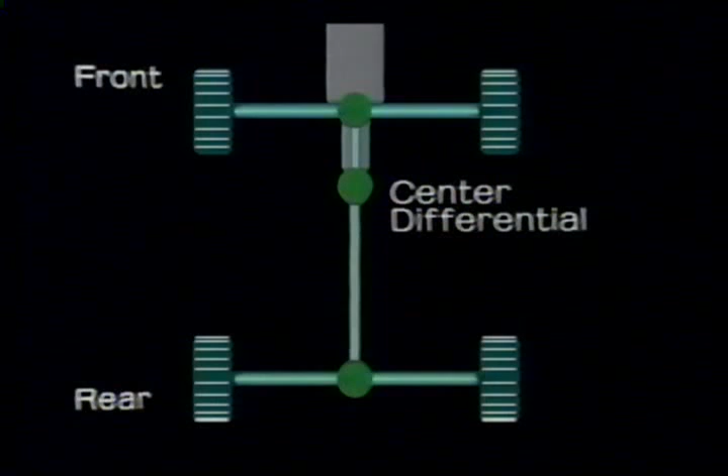To construct a full-time 4WD from a part-time 4WD, Toyota added a differential between the front and rear differentials like this. The third differential is called the center differential.

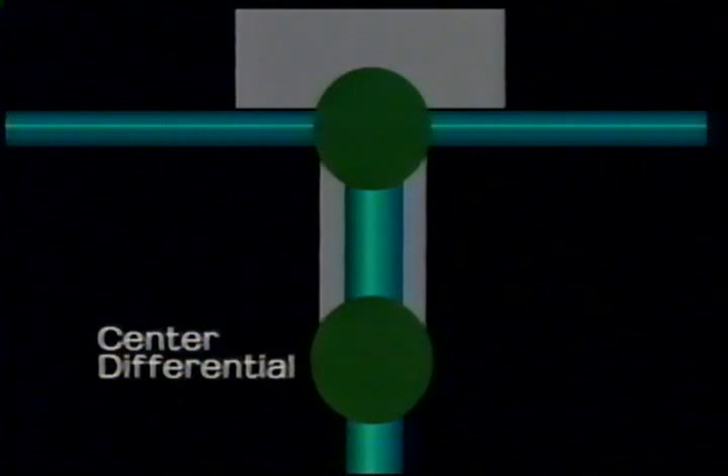Let's examine the center differential using a model. It is built the same way as a conventional differential, and its operation is already familiar to you.

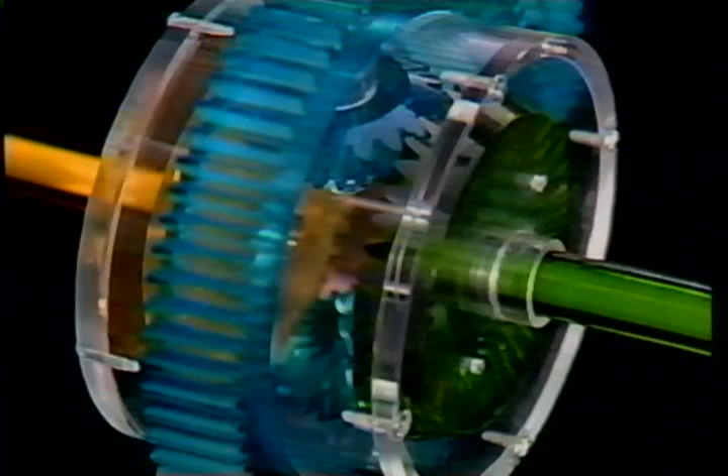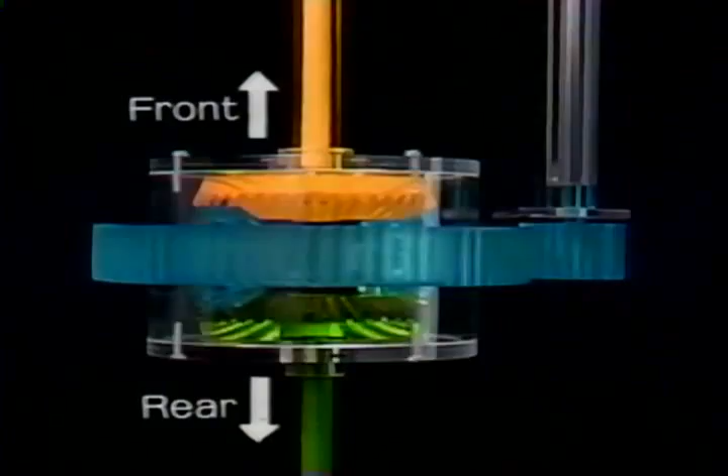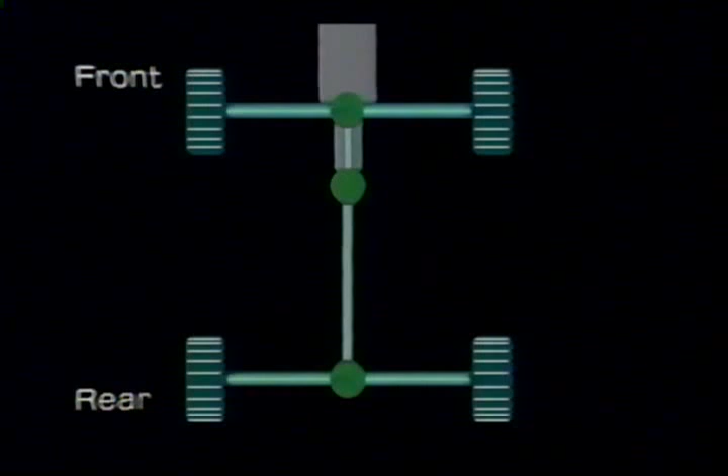The center differential distributes engine power to the front and rear wheels. On a full-time 4WD vehicle, the engine's power is first transmitted to the center differential, then to the front and rear differentials, and finally to the right and left wheels.

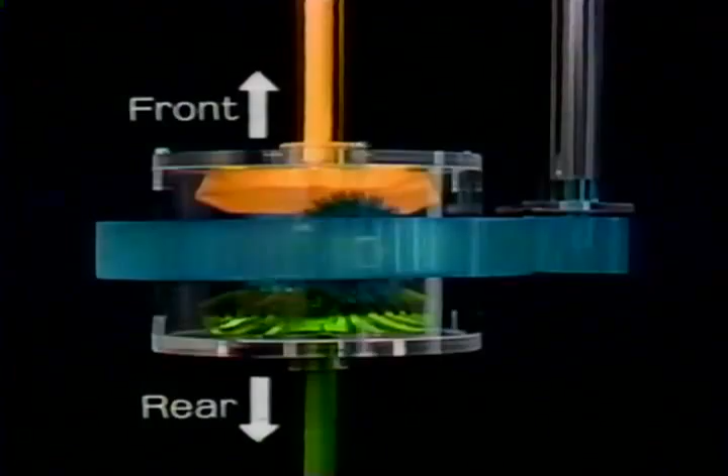But, as you already know, power is no longer transmitted from the engine to a wheel when the other wheel begins to slip. When one of the wheels slips, all other wheels stop running, as you see here.

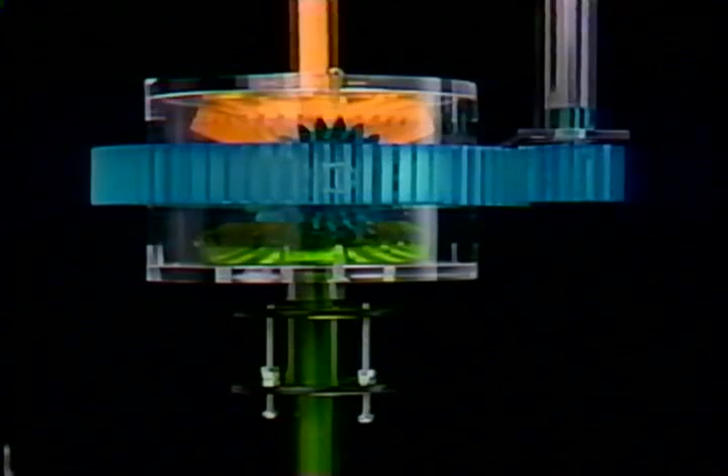This problem, among others, is solved by adding a locking mechanism in the center differential. When the center differential becomes locked, the center differential case and the rear differential are locked like this.

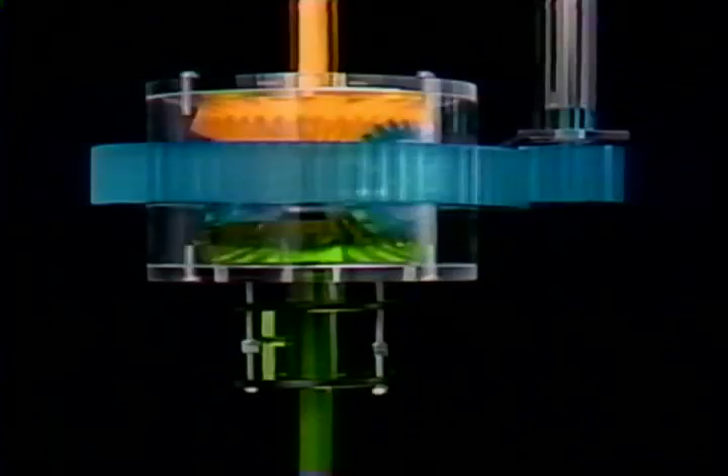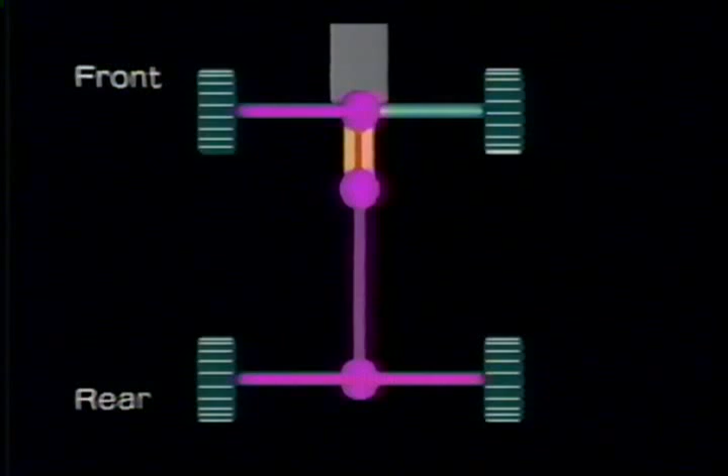When the left front wheel slips, for example, the engine power is still transmitted to the rear wheels when the center differential is locked. The vehicle can get out of the slip situation as a result. On an actual vehicle, the center differential is locked with the differential lock switch.

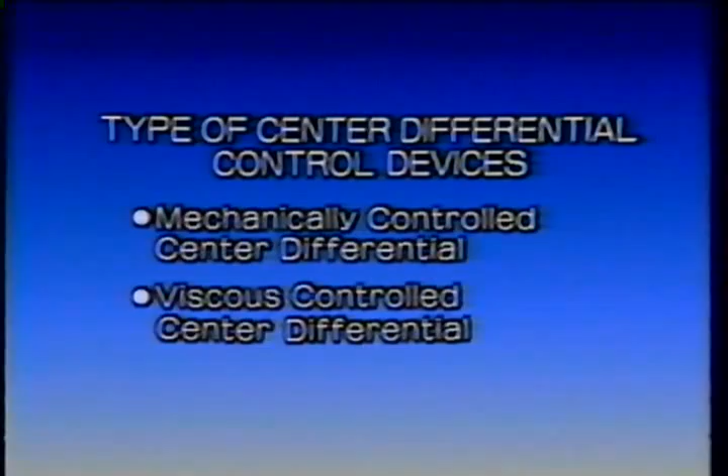The center differential is controlled by a mechanical locking system. The center differential's operation can also be controlled by an additional viscous coupling device. In this video presentation, we will focus primarily on the mechanically controlled center differential.

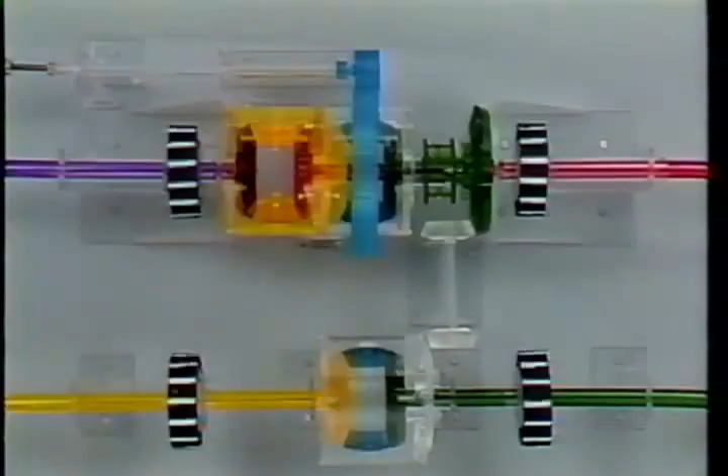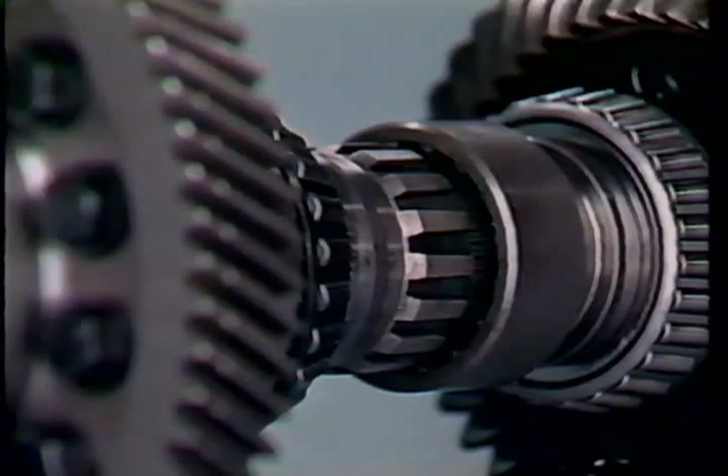We will study the construction and operation of the mechanically controlled center differential, what the driver should know about its uses, what service technicians should know about it, and we will also study the viscous controlled center differential.

Earlier, we looked at the basic construction of a full-time 4WD vehicle. We will now examine the construction of a Toyota full-time 4WD system. The center differential in the Toyota full-time 4WD system has a unique design. The front differential is incorporated in the center differential to form a compact unit, which is located here.

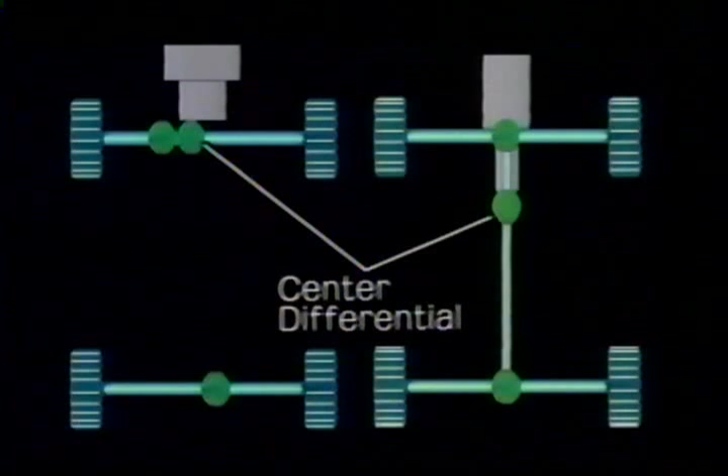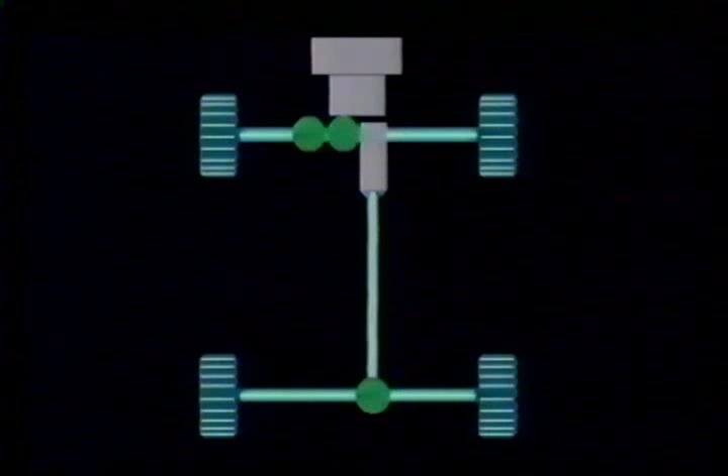It also contains a differential locking mechanism. The transfer is located here. Let's study the transaxle first.

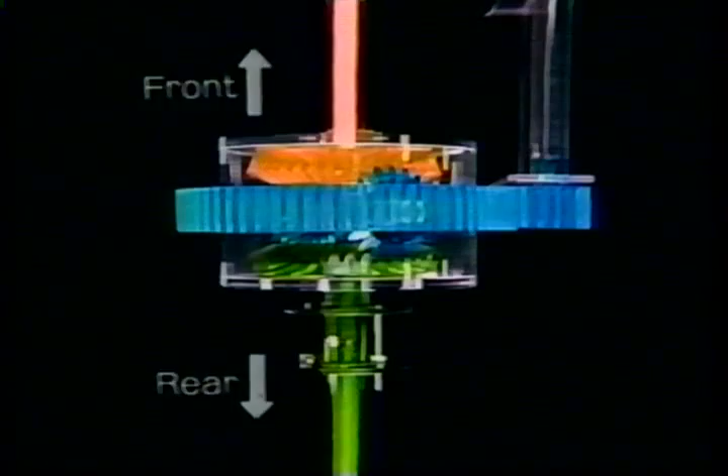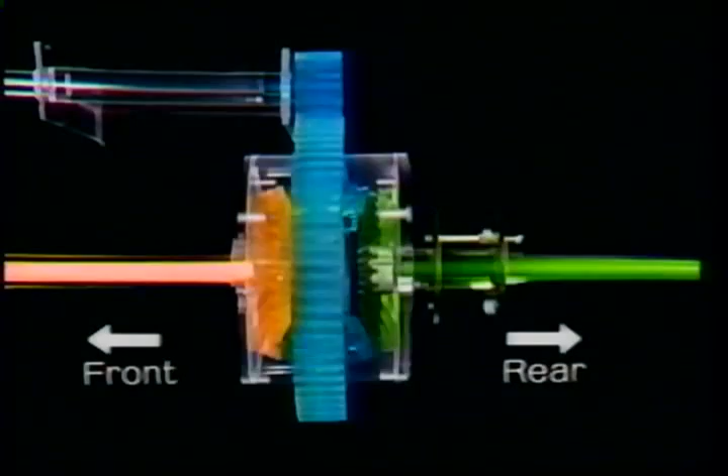This is the center differential. We will turn it horizontally for easier understanding. The driving power is transmitted directly from the transmission to the center differential case. The left side gear drives the front wheels, and the right side gear drives the rear wheels at different speeds.

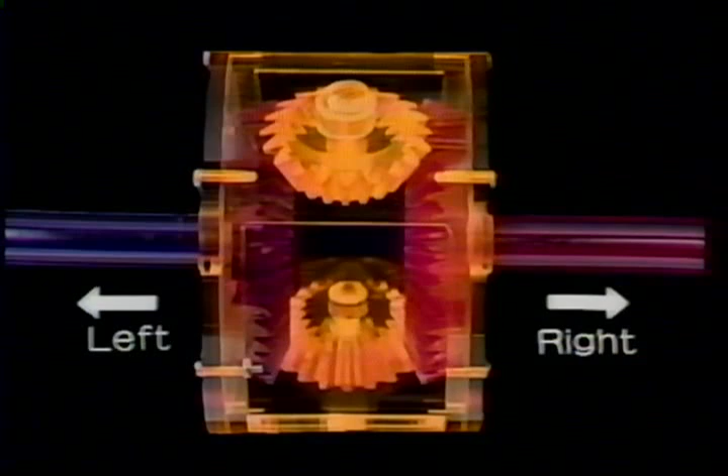Remember that this mechanism is located along the front drive shaft. The next unit is the front differential. You already know how the front differential operates—it operates the same way as in front-wheel drive vehicles. The front differential is also located along the front drive shaft.

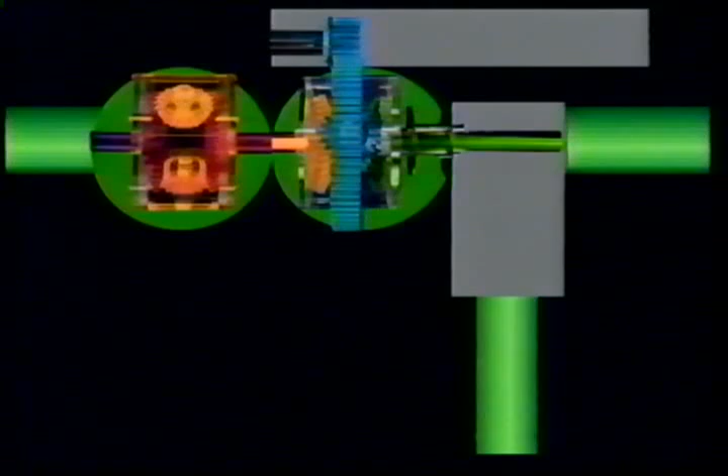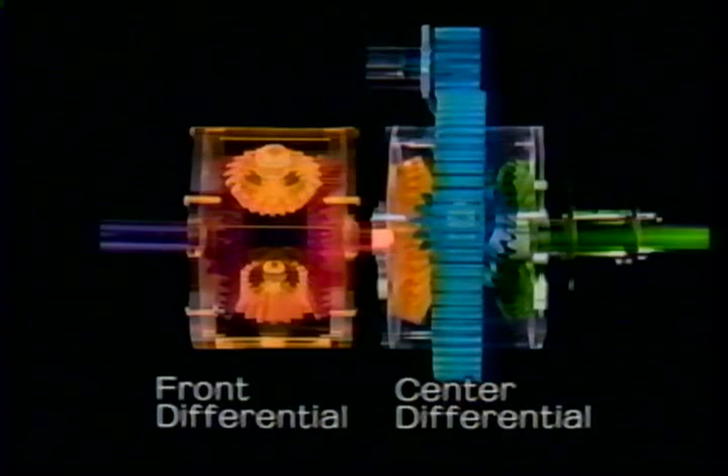Now, let's combine these two differentials. Here is an illustration showing a sectional view. Now you know you must connect the left side gear of the center differential to the front differential case, like this.

The engine power is transmitted like this, but the shaft for driving the rear wheels is also on the front drive shaft.

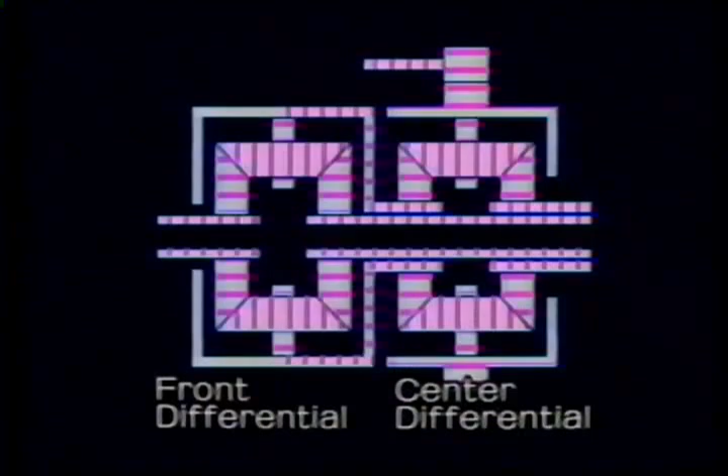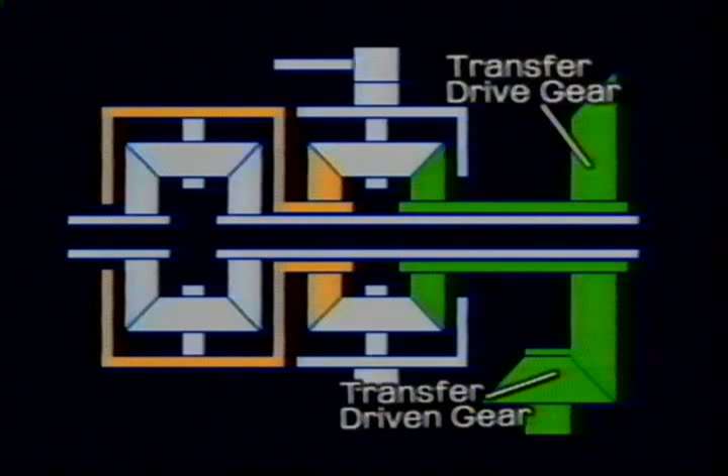So, we add this gear here. The right side gear of the center differential, which drives the rear wheels, is connected to the transfer drive gear on the shaft. And the drive gear transmits power via the transfer driven gear to the propeller shaft, which in turn drives the differential for the rear wheels. This part is for locking the center differential.

The center and front differentials are combined in a compact unit. This model is basically identical in construction to Toyota's full-time 4WD system. Let's see how this model functions.

The vehicle is running straight ahead. In this situation, the front and rear wheels are rotating at the same speed. Power is transmitted 50% to the front and 50% to the rear wheels.

The front and rear wheels run at different speeds when the vehicle comes to a curve or turn. The speed difference is absorbed by the center differential. This prevents braking when the vehicle makes a tight turn.

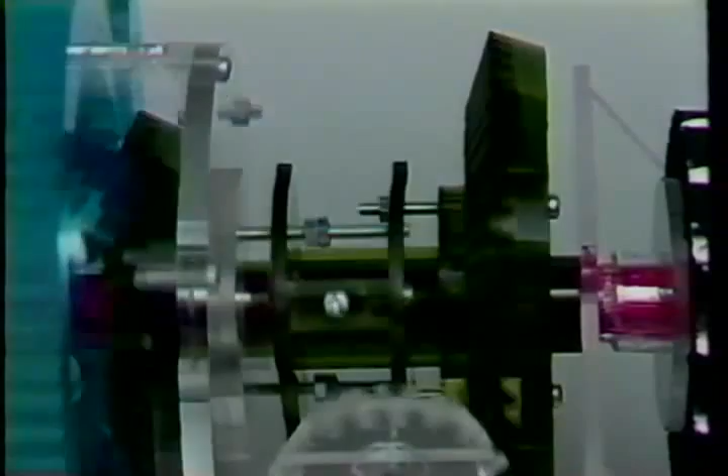Now, what will happen when the front left wheel slips like this? When one of the wheels slips, power is no longer transmitted to the other three wheels until the center differential is locked. When it is locked, the engine power is transmitted to the rear wheels, like this. So the driver can get out of this situation.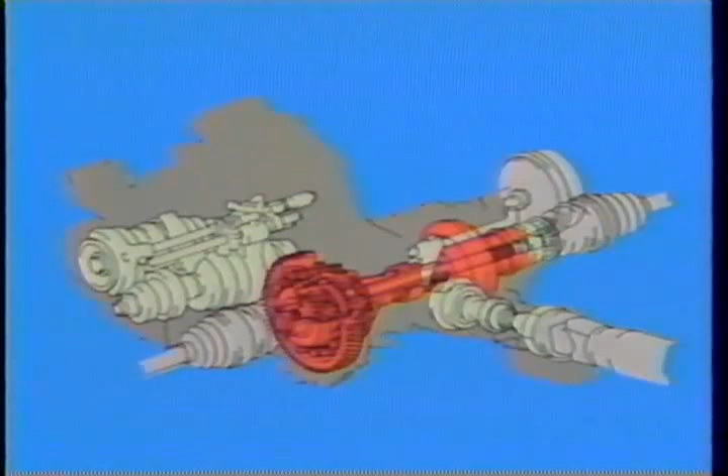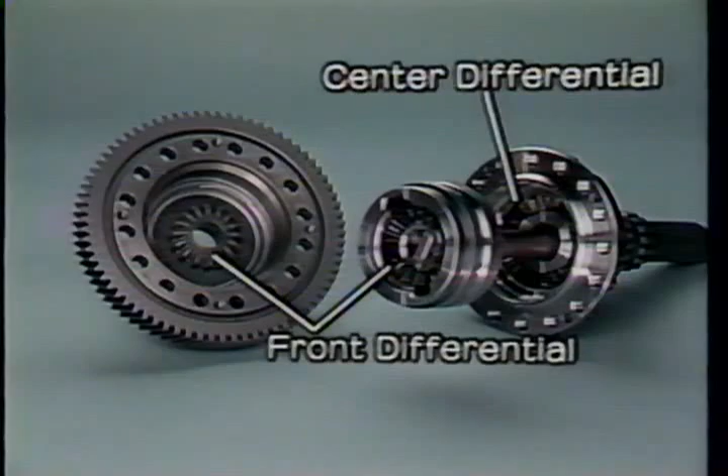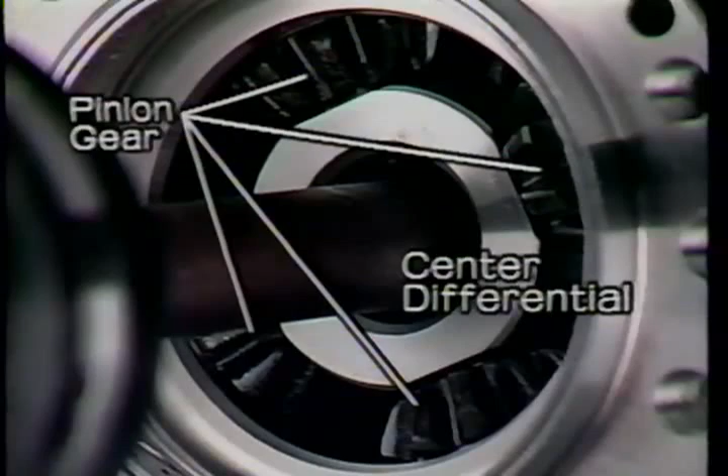Let's look at an actual center differential gear unit. As you see here, both the center and front differentials are contained in the center differential case. The front differential is completely enclosed in the case. The left side gear of the center differential is integrated with the front differential case. This is the differential locking mechanism.

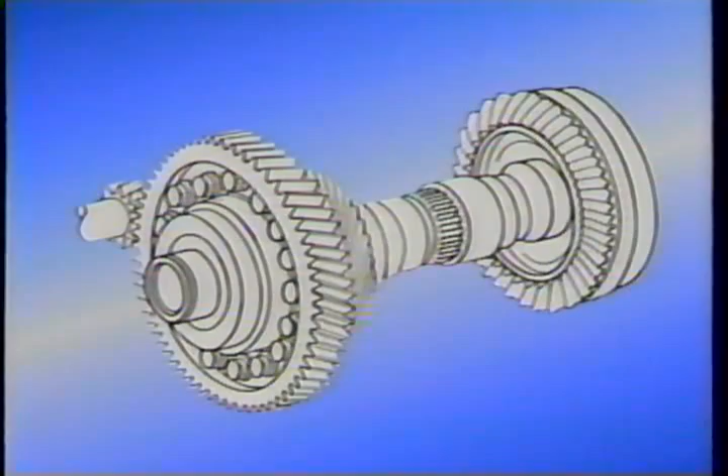We will now examine its construction using a sectional view. The parts are assembled in a very compact design.

Engine power is transmitted to the ring gear of the center differential and causes the center differential case to rotate. This rotates the pinion gear since it is an integral part of the case, and power is transmitted to the rear wheels via the right side gear of the center differential.

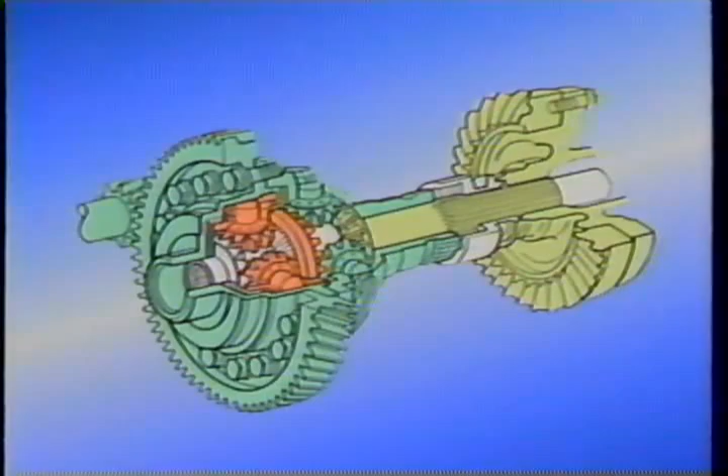The left side gear of the center differential is an integral part of the front differential. Therefore, it causes the pinion gear of the front differential to rotate also. And engine power is transmitted to the front wheels via two front side gears.

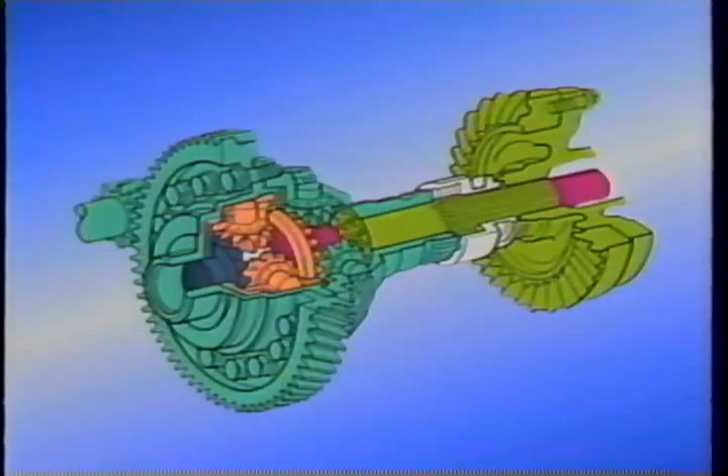When the differential is locked, power to the rear wheels is transmitted from the center differential case directly to the transfer drive gear.

Here are a few important things that the driver must remember about the transfer and transaxle with a mechanically controlled center differential. There are other things that are also important, and you should see the owner's manual in addition to this video presentation.

First, the center differential lock is for emergency use only. The center differential may never be locked under normal conditions. Second, every time the driver operates the center differential lock switch, he must check that the center differential lock indicator lamp goes on when the switch is turned on and off when the switch is turned off.

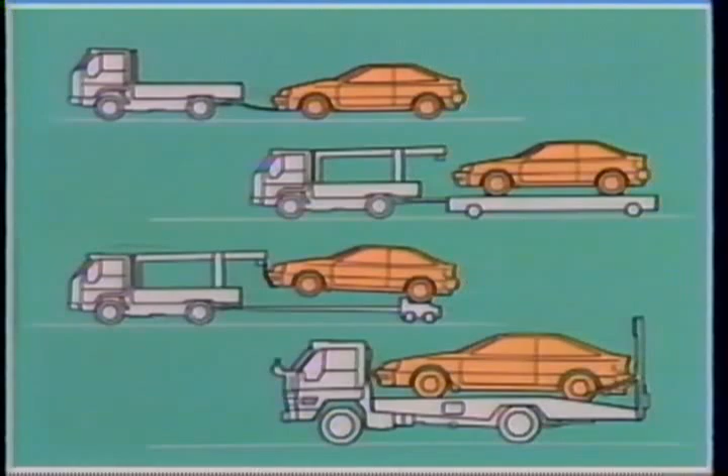Third, these 4 pictures show how the vehicle may be towed away. Towing with a rope, as seen in this picture, is only to be used in case of emergency. Otherwise, towing by the other 3 methods is recommended. The vehicle must never be towed in any other way, since it will apply an extra load to the center differential.

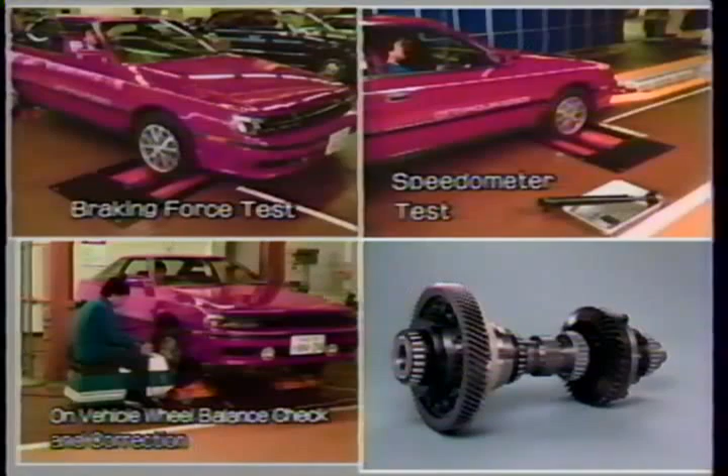There are a few important things that technicians must remember about vehicles with a transaxle with a mechanically controlled center differential. As you know, the difference in speed between the front and rear wheels is absorbed by the center differential on this type of transaxle.

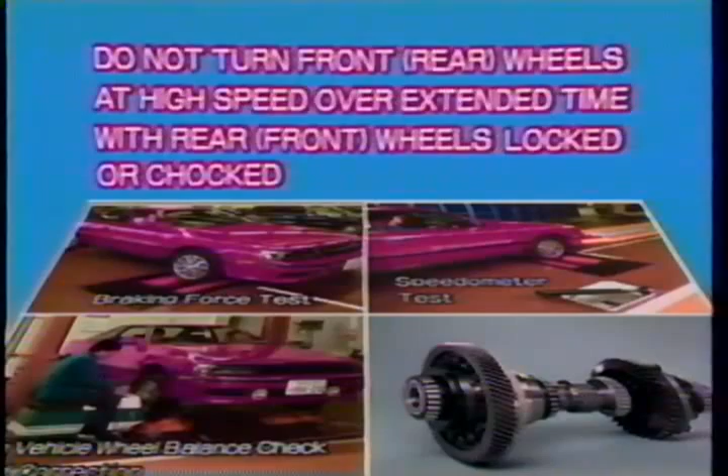If you turn the front wheels at a high speed for a long time when the rear wheels are locked or chocked, or vice versa, it will damage the center differential.

Therefore, please refer to the new car features and service training information publications for details before starting these tests and checks, as they may require some special preparation.

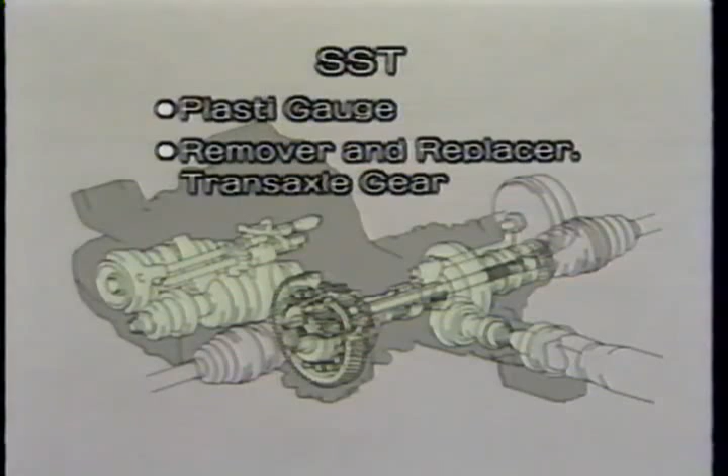2 special service tools are used with this type of transaxle. Plasti Gauge is used to select the thrust washer for the center differential side gear of the mechanically controlled center differential.

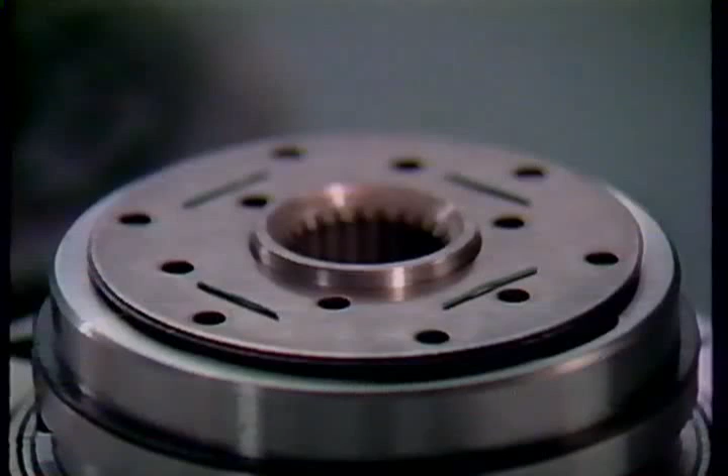This is a center differential gear unit. The major difference from the mechanically controlled transaxle is this viscous coupling. Let's take a closer look at the viscous coupling.

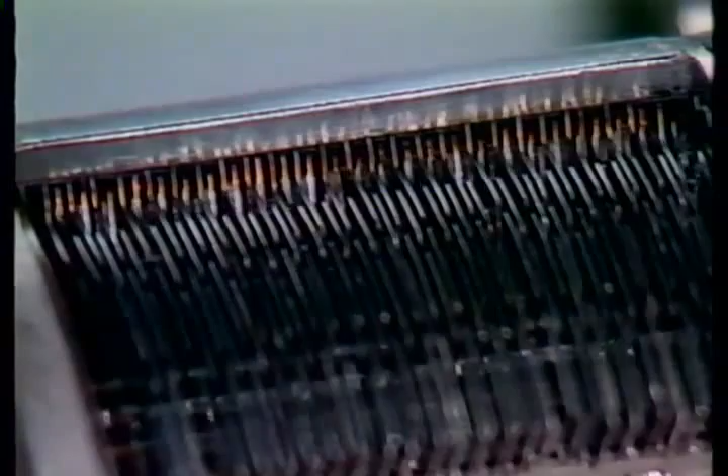This is a cutaway model of the viscous coupling. It contains 2 kinds of plates assembled alternately with a small gap between them.

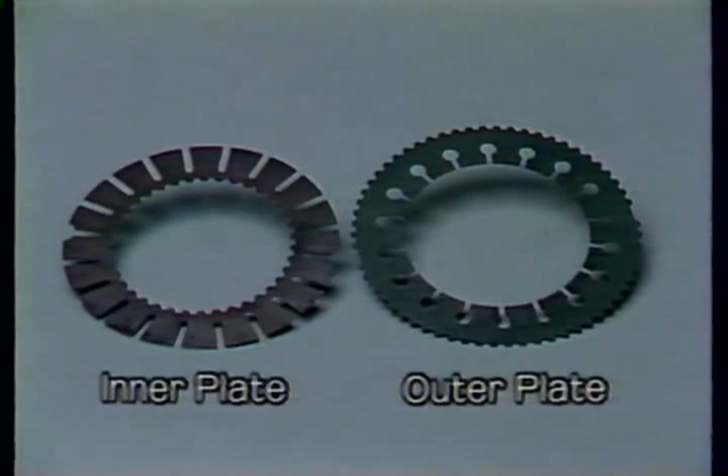When the inner shaft is turned, it moves the inner plates. As you see here, inner plates are built in such a way that they rotate as a unit with the inner shaft, and the outer plates are built in such a way that they rotate as a unit with the housing.

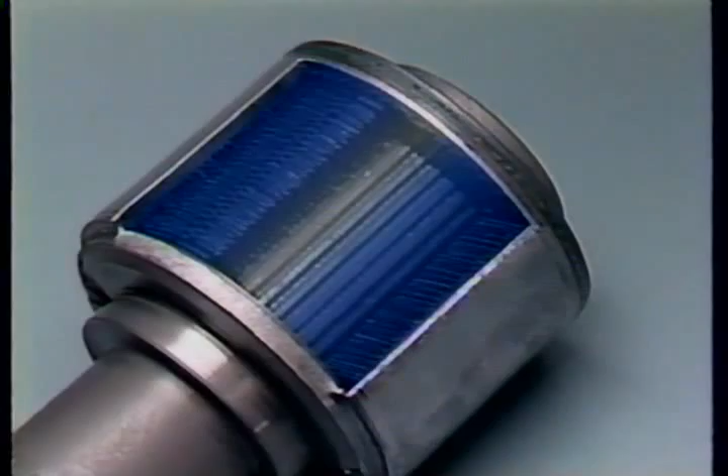The viscous coupling case is filled with high viscosity silicone oil. We will next examine how the viscous coupling controls the movement of the center differential.

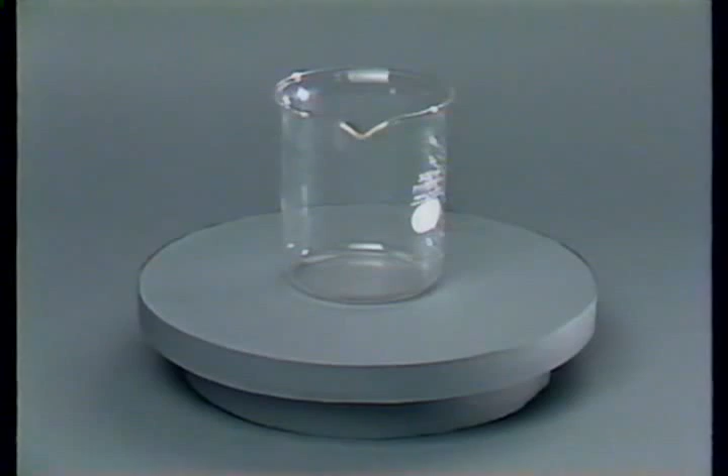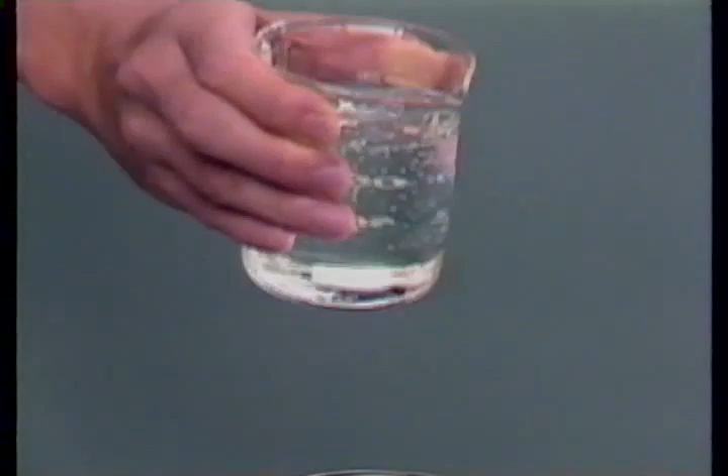A beaker is placed on a rotating table. And we pour highly viscous liquid into it.

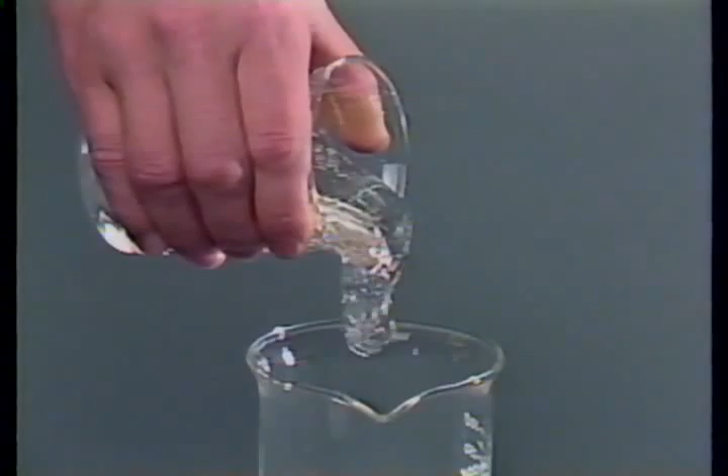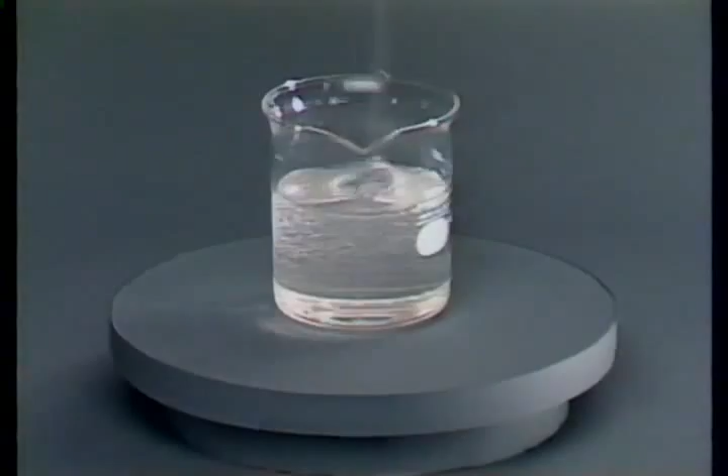When we stir the liquid very slowly with a mixing rod, the beaker remains still. If you move the rod very fast, like this, the beaker starts to turn along with the liquid inside. This means a highly viscous liquid transmits power when there is a large difference in speed.

It is this principle that is used in a viscous coupling to control the movement of the center differential. We will now study how the viscous coupling is assembled in the transaxle.

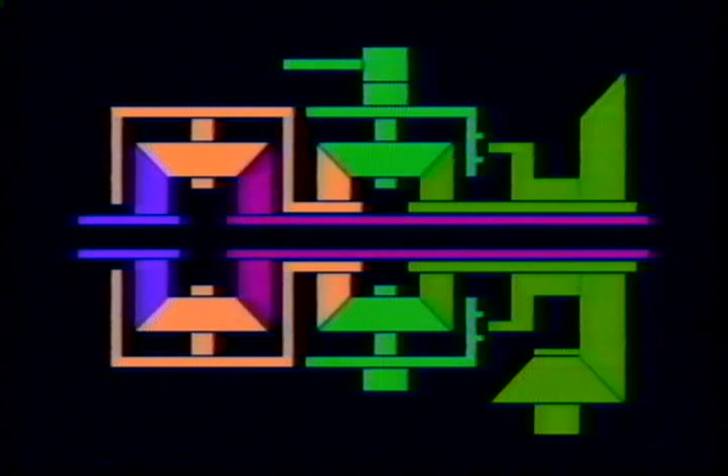Please recall the mechanically controlled transaxle. We will build a viscous controlled transaxle from a mechanically controlled transaxle. Let's remove the differential lock mechanism, as we do not need it now.

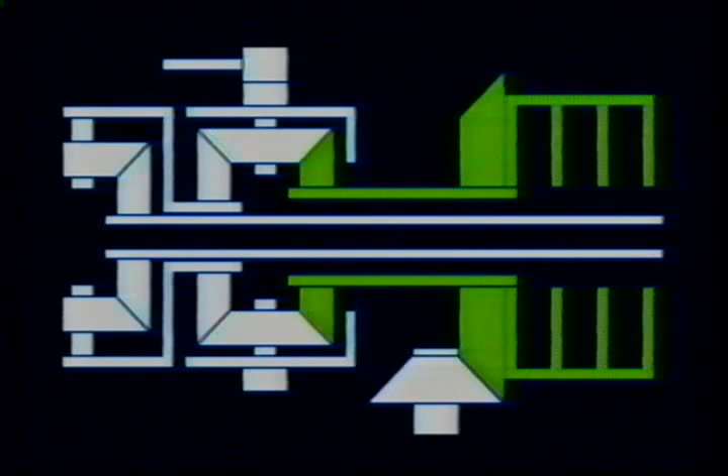The viscous coupling housing and outer plates are integrated with the drive gear of the transaxle. The shaft extends from the left side gear of the center differential. It is an integral part of the inner shaft, and the inner plates are fitted to the inner shaft.

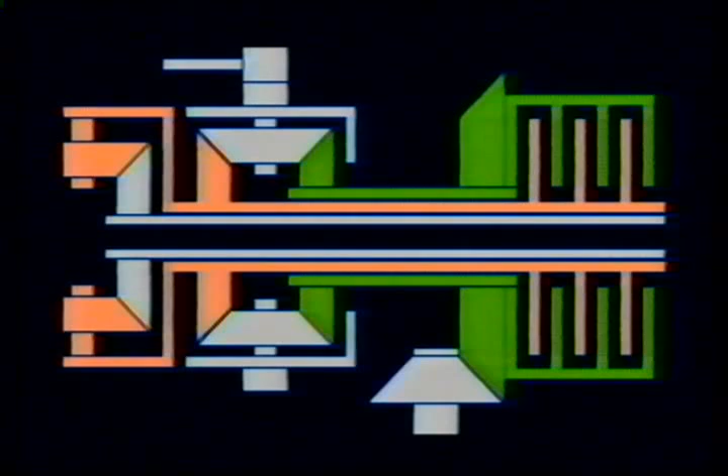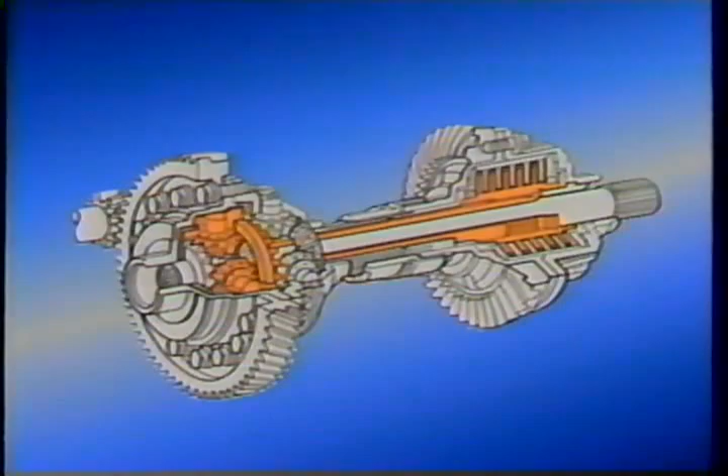As you will notice, the viscous coupling connects the left side gear and right side gear of the center differential. This is the center differential gear unit. The inner shaft of the viscous coupling is connected to the left side gear of the center differential. Its outer plates are connected to the right side gear of the center differential.

Now, let's examine how the viscous coupling works. When the car is running straight ahead, the front and rear wheels turn at the same speed. The inner plates turn at the same speed as the front wheels, and the outer plates turn at the same speed as the rear wheels. Since both plates turn at the same speed, the viscous coupling does not transmit engine power in this situation.

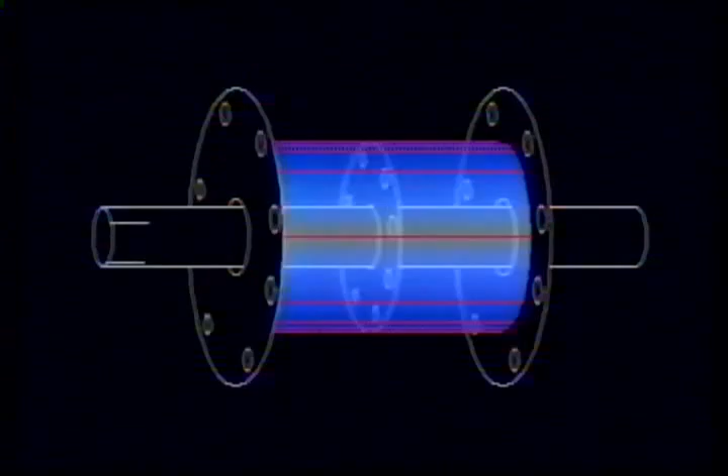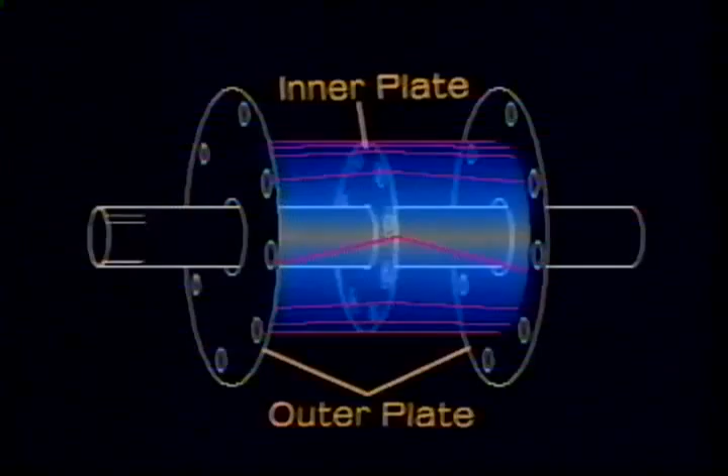This shows what will happen on a vehicle carrying a mechanically controlled transaxle when one of its front wheels slips. However, when a wheel slips on a vehicle that has a viscous controlled transaxle, the inner plates start to turn faster as the front wheel turns faster, and there is a difference between the inner and outer plate speeds.

As you saw in the experiment with the viscous liquid and a beaker, the outer plates turn at the same speed as the inner plates due to the viscosity of the silicone oil. In this way, the viscous coupling works to eliminate differences between the front and rear wheel speeds, and thus controls the operation of the center differential.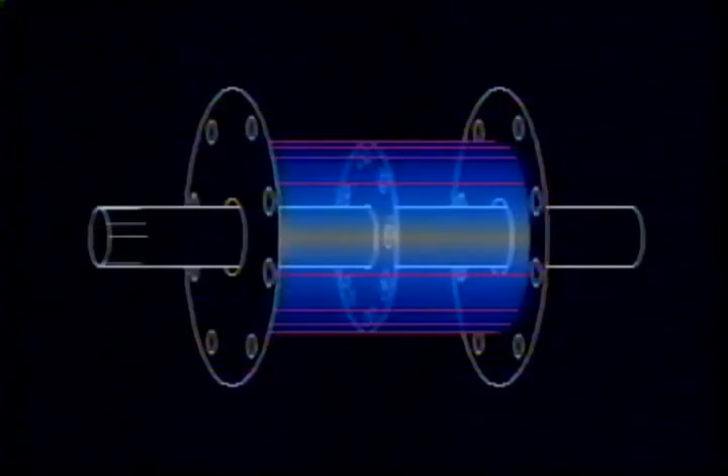Thus, the driver can exert control when one of the wheels slips without the help of a mechanical lock.

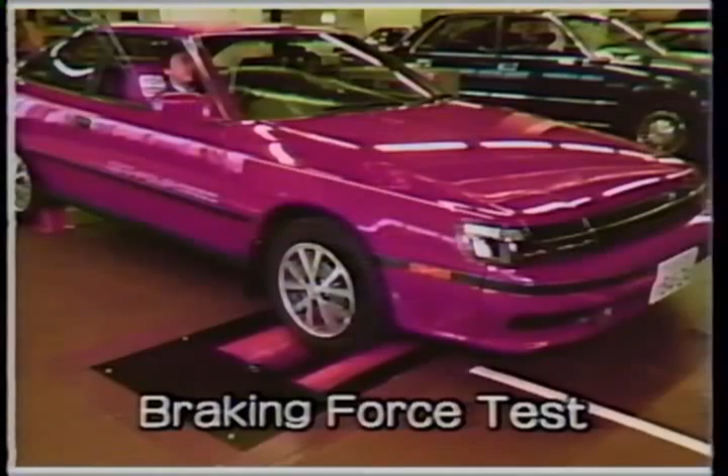There are a few important things that technicians must remember about vehicles with a transaxle with a viscous controlled center differential. It is very dangerous to carry out certain tests or checks on these vehicles in the same way as conventional vehicles. It is not only dangerous, but will also seriously damage the transaxle.

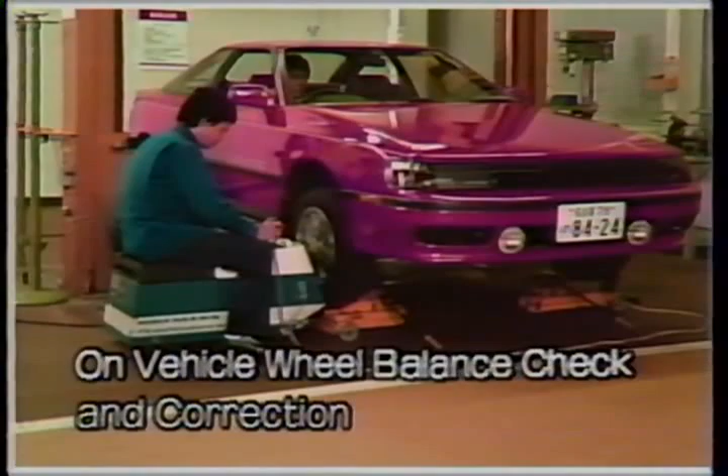A difference in speed between the front and rear wheels is controlled not only by the center differential, but also by the viscous coupling on this type of transaxle. If you turn the front wheels when the rear wheels are locked or chocked, or vice versa, the vehicle may jerk suddenly, which could lead to serious consequences.

The compact center differential, based on Toyota's creative technical development, is the heart of the new type of full-time 4WD vehicles.

In this video presentation, we have explained about the construction and operation of the transaxle and transfer, focusing on the full-time 4WD system with mechanically controlled and viscous controlled center differentials. We have also explained some points you must remember about operating and servicing them. We hope that you have thoroughly understood the contents.